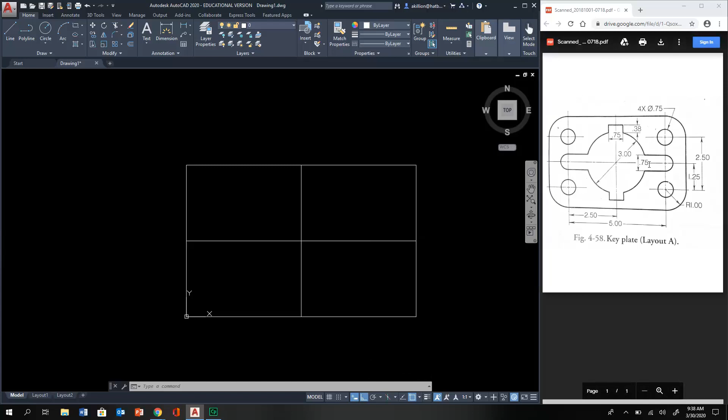Okay, so that's given me, like I said, a line right through the middle, horizontally and vertically. I now got to lay out the center lines for this vertical line on the right and the left, and the center lines horizontally up above and down below.

And if you look at those, they are spaced out 1.25 down and then 2.5 up off of that, which would be another 1.25. And horizontally, it's 2.5 and then 5, or I could go 2.5 and 2.5. So to do that, I'm going to go O, enter, or spacebar for offset. So specify offset distance. So basically, how far are you going to move this? This is going to be 2.5 going horizontally to the left or right. So I'll type in 2.5, hit enter or spacebar.

So select object to offset. So what do you want to move? I'm going to click on my middle line, and then it says specify point on side to offset. Do you want to go 2.5 to the left or 2.5 to the right? It doesn't matter. You're going to do it both ways. So I'll click to the left. It now puts me back into my select object to offset, so I'll click my middle line again, and now I'll drag it to the right and click. Okay, so that put both of those where I need them. I can then hit escape.

If I hit spacebar again, it'll put me into my last command, which was offset. So now it says specify offset distance. I'm going to type in now 1.25 and hit enter. Now it says select object to offset. So I'll click my middle line that's going horizontal. I'll drag it up. I'll do the same thing and I will go down. That has now set up the center point for all of my circles and arcs.

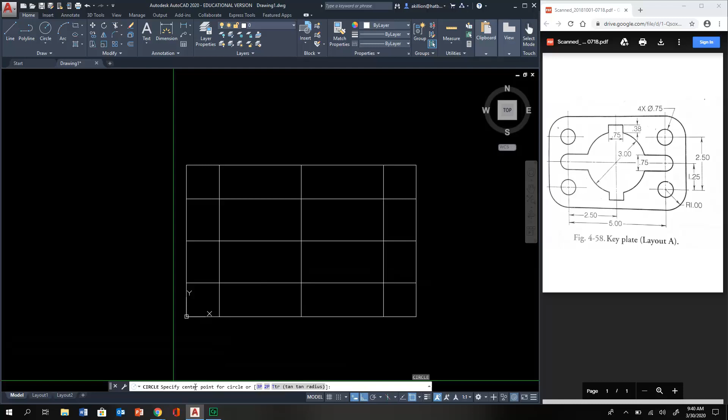So at this point, we're going to draw a bunch of circles. So my big one in the middle is a diameter of 3 inches. You can see that right here. So I'll say C, enter, or spacebar for circle. It says specify center point. So where do you want to put the center? That's going to be right at that intersection, so I can click there. Now, if you notice, it says specify radius. So if I would type a size, it's going to give me the radius.

If I want to do diameter, I can either click on the word diameter in my command line, or I could hit D, enter, and now it says specify diameter. So now I can type in 3, enter, or spacebar. That is now giving me the correct size circle there. We're now going to take care of these 4 small ones. 4x, circle with a line through it, which would be diameter, 0.75. So they are all the same.

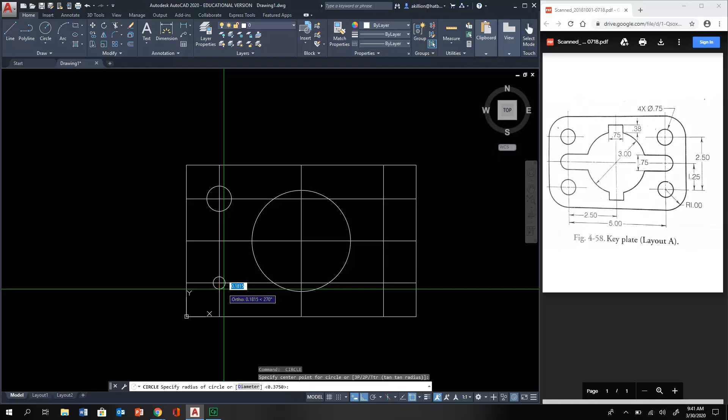So I'm going to say C, enter, specify center point. Doesn't matter which one you click on first. I'm just going to do this top left one. Specify radius or diameter. Once again, I want diameter, so I'll click on that. My diameter was 3/4 or 0.75. Now, my last command was circle, so if I hit spacebar or enter, it'll put me back into it. I can click my next center point, and if I just hit spacebar or enter again, it'll give me the exact same size that I just made that last circle. So I can just quickly go spacebar, click, spacebar, spacebar, click, spacebar. That's giving me those circles.

Now these circles right here are these arcs. You can see it's a diameter from edge to edge of 0.75. So it's actually the same size circle as this. So I'll say spacebar, click, spacebar, spacebar, click, spacebar. The only thing that's different is I'm going to trim these. So if you forget, trim is TR. We do spacebar twice, and then I can just click on both of those areas to clean them up. Okay, so we're getting pretty far.

My next thing is I'm going to make a connecting straight line across for the slot here. So that's pretty easy. L, enter. I'm just simply going to click that point, come over, click my other point, spacebar again, click that point, come over, click that point as well. Last thing to do there would be, once again, TR, spacebar twice. I'll trim that area, that area, that area, those two, and that. That is now giving me my slot.

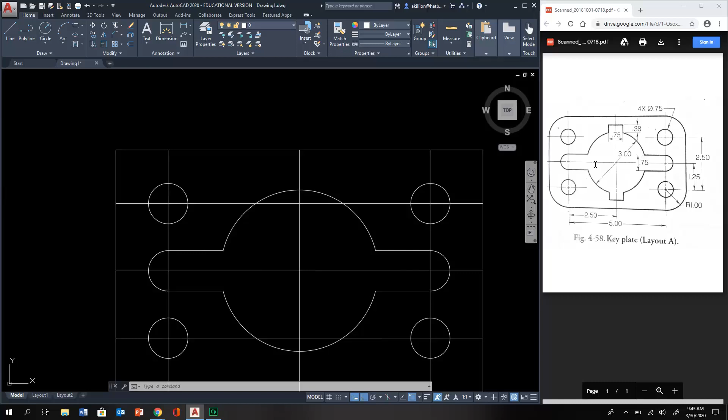Okay. So these corners we're going to do last. Our last thing before those is this little area up top, which is 3/4 or 0.75 wide and 0.38 from where it meets the circle to the top. The nice thing about that is we can do that pretty easily.

So if 0.75 is 3/4, half of that is 3/8. So when I offset, I'm going to say O, enter for offset. We're just going to type in 3 divide 8 for 3/8. I'm going to click my middle line for the object to offset. I'm going to drag to the left and click. Well, I guess I went to the right, and I'm going to drag farther to the left and click.

That is now giving me a 3/4 because 3/8 and 3/8 is 3/4. So that's giving me my slot width. Now, in order to get this 0.38, I'm going to go L, enter, and I'm just going to connect those 2 points. Reason being, I can now offset that, O, enter, 0.38, which is the size it gives you, enter, click that line, and drag it up.

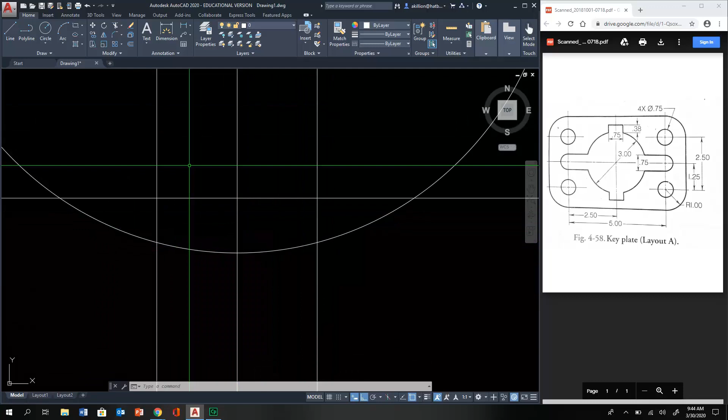Then I can select this, delete it, and then once again, TR, spacebar twice to trim. Just trim those, that, that, and that, and that is now taking care of the top portion. So we'll do it again on the bottom. Once again, I offset already the 3/8 and the 3/8. That stayed with the top. I'll now draw a line to connect these 2 points.

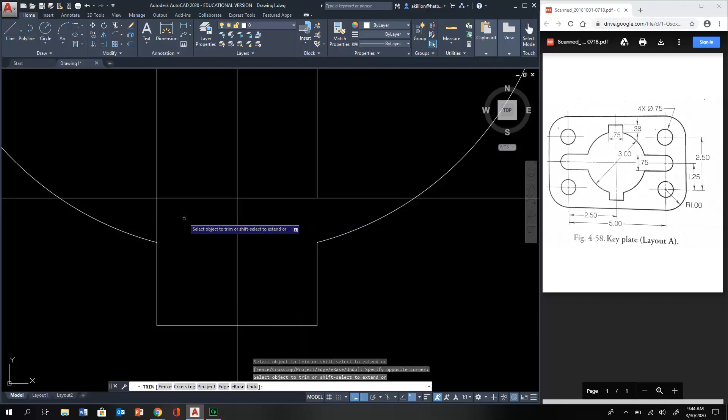I can then once again offset 0.38, click my line, bring it down, select my line, delete it, and then I can just go TR spacebar twice to trim. Make sure I'm paying attention to my drawing so that I trim just the correct areas. And then that's taking care of that. Now, this area right here, I don't need to worry about trimming. I can just select it and press my delete key to get rid of that.

So the last thing with the actual object is these corners, which is a radius of 1. The easiest way to do that is with a command that's called fillet. So the fillet command is F, enter. It says select first object, but before we do that, our radius right now is 0, more than likely. Yours might be something different, but we want to change that so it's the correct size. So in order to do that, we come down here to radius, and we click on radius.

Now it says specify fillet radius. You type 1, hit enter. Now it takes you back to select first object, so all you got to do is click your first line, then click your second line, and it cleans it up for you. So once again, that was F, enter. My radius stays at 1. Okay, so I can just come back in here and just click this line, and once again it does it. You can just hit F, enter, or you can just hit enter to put you back into that last command.

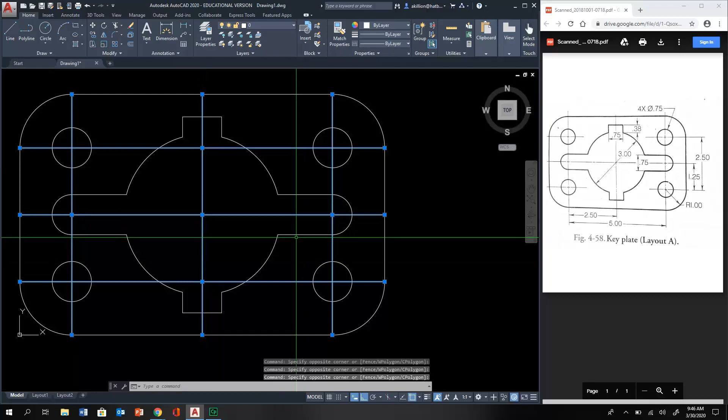Once again, if this is not 1, you need to click on radius, type 1, hit enter, and then come back in and select your lines. Same thing down below. That's taking care of essentially the drawing. What we're going to do is we're going to clean this up a little bit to make it look a little bit more professional and correct by selecting all my vertical and horizontal center lines and deleting those. And we're going to make these center lines.

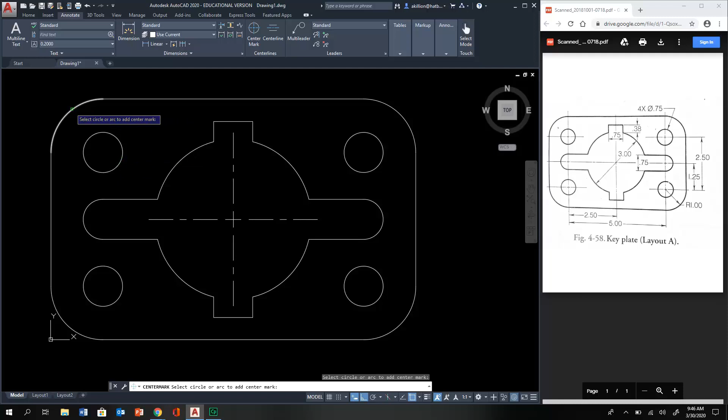Easiest way to make center lines for circles and arcs is to come to your Annotate tab up top on your ribbon. On my Annotate tab, I'll come over to the center lines area. I will click on the center mark for circles and arcs. So once you click on that, if I click my big circle, it gives me my center lines there. To do the center lines for these small circles, do not click on the small circles. You want to click on the outside radius because it's also a center line for that outside radius.

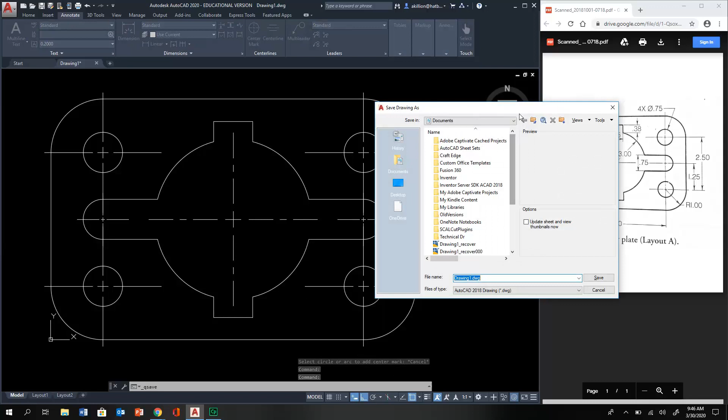So clicking on all of those. And then the last ones is to click on these little inside arcs just to get you those 2 little ones. And then at that point, you can hit escape. Make sure you save this. So Control S. I personally save it as Fig 4-58 key plate. And then you're going to want to save that to your tech drawing folder, which hopefully is in your Z drive. Mine is going to be a little bit different than you.

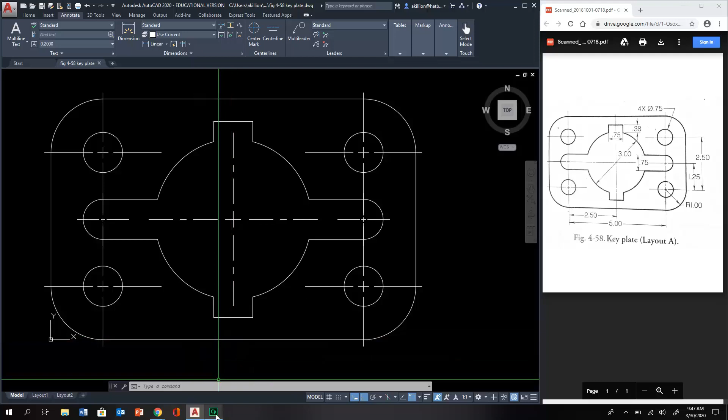There's that. Save. And at that point, you are done the second drawing. The last thing we'll do is change some line weights, but we will go over that in the printing demo. So I'll make that shortly and put that up.